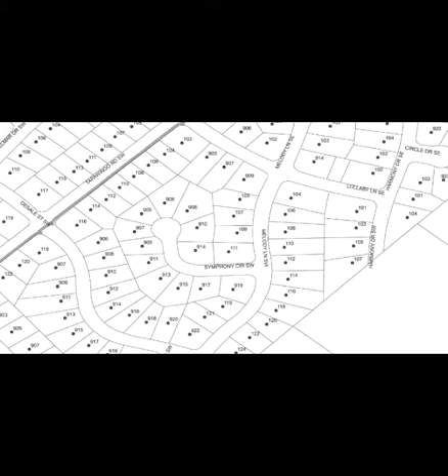Neither of the concepts to be presented with this report extend into the cul-de-sac and route around the perimeter of the cul-de-sac. Both concepts reach into the main stem of the roadway a sufficient distance to increase the sight distance. So here's a diagram that illustrates the sight distance. Here we have a vehicle that's just turned off of Melody Lane onto Symphony Circle Southwest.

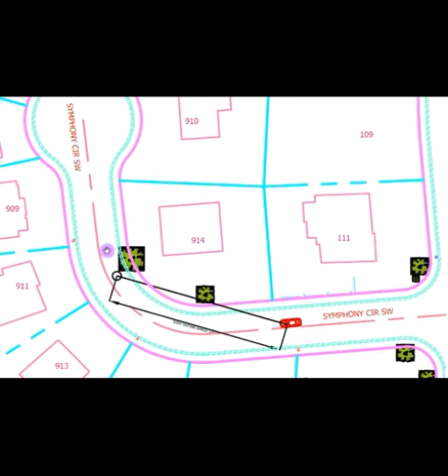When the vehicle is at this location, the topography, the elevation of this yard, as well as the existing tree here and the existing tree here, limits the driver's ability to see beyond the turn in this area. His vision is obstructed. The driver has clear vision in this area that I'll outline here. That's the driver's area where he has clear vision. But beyond that, farther into the cul-de-sac, his vision is obstructed by the trees and the topography, the elevation in the yard of 914.

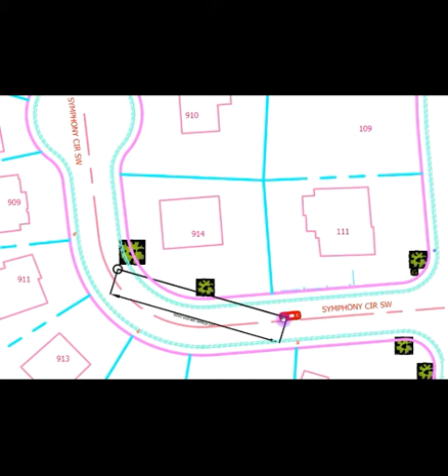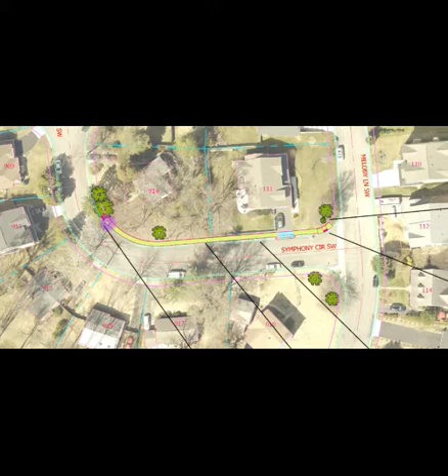This is Concept 1, which is sidewalk along the north side of Symphony Circle Southwest, which would be the even side addresses. It starts at the curb return of Melody Lane and extends along this main stem section of the roadway to where the existing Norway spruce is, and it ends with an ADA ramp at that location. Let's look at the typical section for Concept 1.

First of all, we have a 36-foot wide street from the face of the curb to the face of the curb, 36 feet. We have a 50-foot existing right-of-way. So that means that we have 7 feet from the face of the curb to the right-of-way on each side. For this concept, we're using a 1.5-foot utility strip behind the existing curb and then a 5-foot concrete sidewalk.

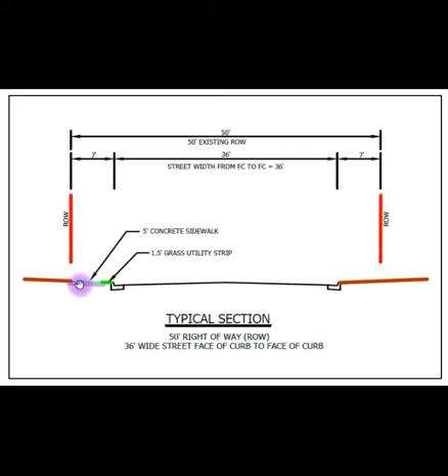As an alternative to this, in the later stages of design, we could use a different section, which would be a 6-foot concrete sidewalk behind the existing curb and not have a utility strip. That could be determined later in the design.

Here we're looking at an aerial photograph with Concept 1 drawn on top of it. You can see on the photograph the magenta lines, which represent the right-of-way lines. The cyan lines represent the property lines. These green symbols are the trees that were part of the tree inventory done by our arborist.

So for example, this is an 11-inch Norway spruce. This is an 18-inch diameter Norway spruce. This tree is one that was just planted by the development as it was being completed. And also this photograph of this lot shows this is the house that's been removed and a new house has been constructed. The approximate footprint of that house is shown in the pink line here.

So here is an ADA ramp, which is the end of the project on the western end. And then we have the sidewalk along the frontage of 914. And then here at the corner property, which is 111 Melody Lane, there's an existing fence that starts approximately at this location, and it extends to where the driveway is. So we'll have the sidewalk outside of that fence running parallel to the fence, and then we'll have a replacement driveway apron, and then we'll have at the curb return another ADA ramp.

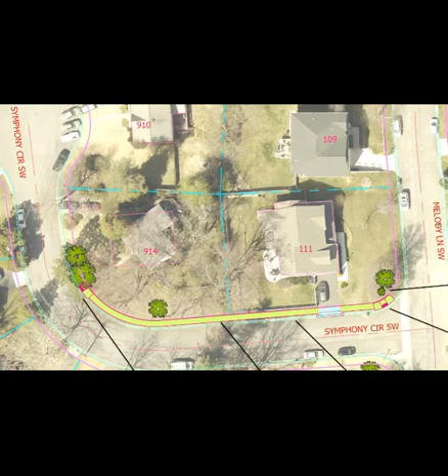Next, let's look at the photographs of the areas of the design. Here you can see where the project ends. This is the 18-inch Norway spruce, and this is the 11-inch Norway spruce. This is the site while it was still in construction, but the ADA ramp would be approximately at this location here.

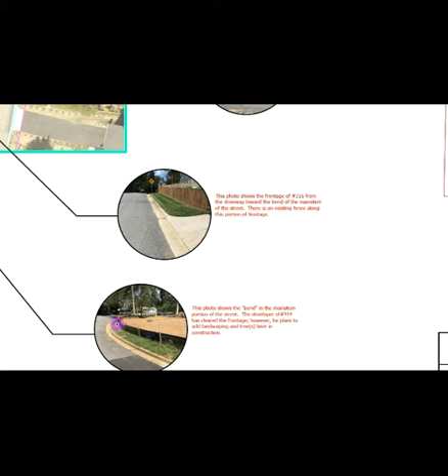Okay, here in the next photograph, what we're looking at is the curb return where the main stem of Symphony Circle starts to round the corner going towards the cul-de-sac. Again, this photograph was taken during the construction. You can see the silt fence is up, but that house has since been completed and the lot has been regraded, so it looks different than that today.

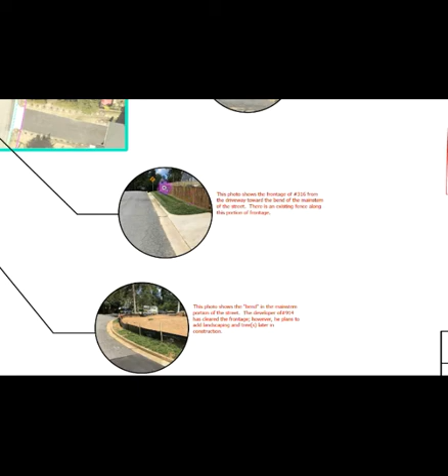Now let's look at the photo above. This photo shows the frontage of 316, taken approximately from the driveway, looking to the west towards the bend of the main street. You can see there's an existing fence along this property. Here's the existing curb, and the proposed sidewalk would go between the two.

Okay, next, in this photograph, we're standing at the intersection of Melody Lane. We're looking to the west, and here you can see the driveway that we mentioned, existing fence, and the sidewalk will continue across the driveway and will end approximately at this location.

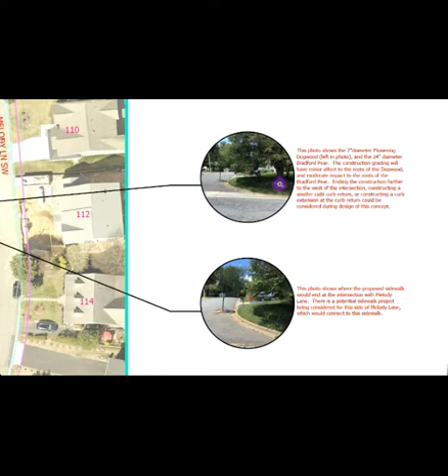The next photo above is taken from across the street, across Melody Lane, looking towards where the project is. Again, the project ends at about this location, and at this corner you can see there's an existing 24-inch diameter Bradford pear, and then just next to it there's a 7-inch diameter flowering dogwood.

So that's concept one, which is sidewalk on the north side, which is the even side of Symphony Circle. And it's a design which has the sidewalk extending about 250 feet from Melody Lane into Symphony Circle Southwest. Next, let's look at concept two.

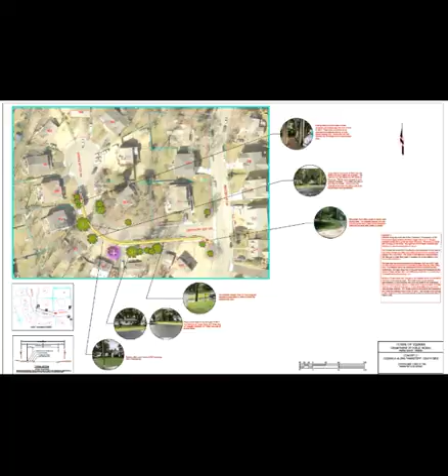Here we have concept two. Concept two is a lot more challenging than the first concept, and the reason for that is we have larger trees along the frontages of the properties, and also we have existing utility poles. The big challenge with concept two is getting around this existing utility pole, which is situated between 917 and 919. Let's look at the photograph of that location.

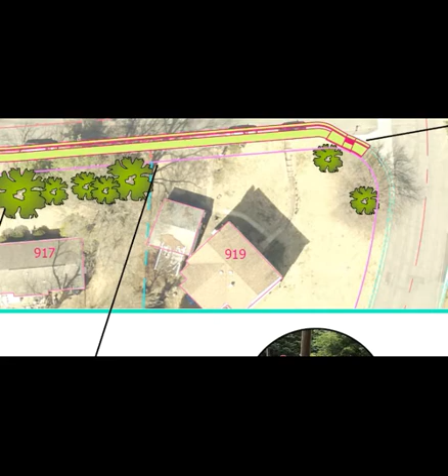Okay, here you can see is the existing utility pole, existing curb, and here's the existing fence, which is actually at the property line. There's no way to put a sidewalk between the curb and the pole in the front, and there's no way to put a sidewalk behind the pole and in front of the fence. So the only way to get around this issue is to bring the sidewalk inside of the street. In other words, rebuild the street to a narrow width, rebuild the curb, and then put the sidewalk in this area.

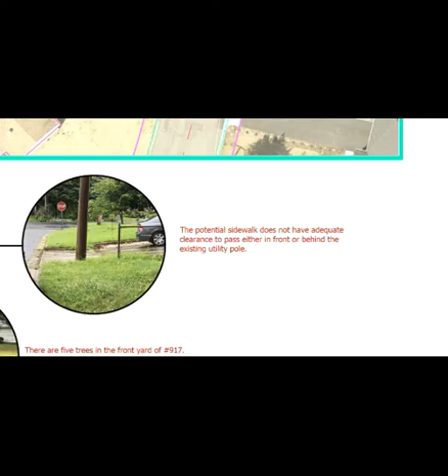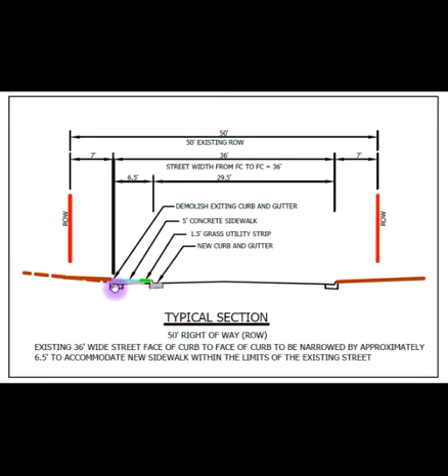And what that would involve is bringing the new curb in 6.5 feet from where the old curb is, resulting in a street width of 29.5 feet, which would allow 6.5 feet between where the new curb is going to be and where the old curb was taken out.

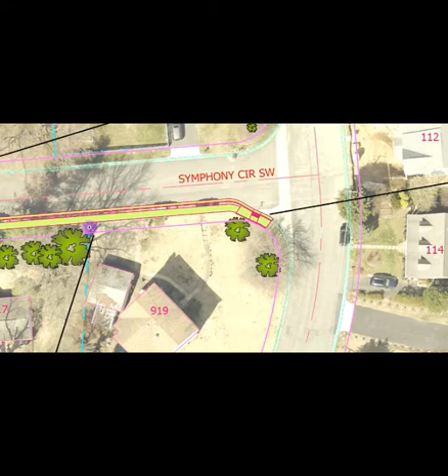Here's a closer look at the alignment starting at Melody Lane. We have a new ADA ramp which ties into the existing curb at Melody Lane. Here is where we make the transition to the narrower width. So we have a 29.5 foot width from face of curb to face of curb. Here between 919 and 917, here's that utility pole that we saw in the photograph. And now let's move farther down the street to the next property.

At 917, there are quite a few trees in this frontage. Some of them are fairly large trees, but because the new curb and sidewalk is inside of the old curb, I'm not real concerned about cutting the tree roots because we're already underneath where the existing pavement is.

Likewise, in 915, there's a large tree, but because the construction is taking place inside of where the old street is, I'm not too concerned about the tree roots of that tree. Here, between 915 and 913, there's another utility pole. Now let's take a look at the photographs of those features.

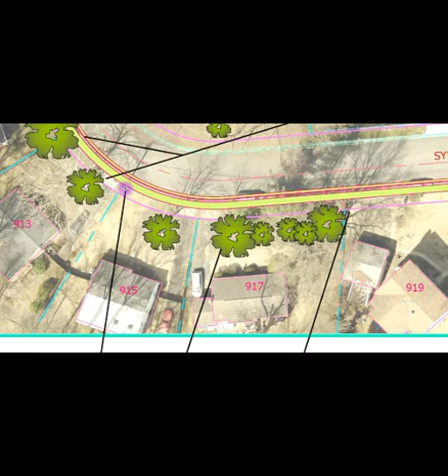Here we have the frontage of 917 in this photograph. We have a 24-inch sugar maple, 18-inch white pine, 12-inch Canadian hemlock, 18-inch white pine, and a 26-inch Norway maple that shows up in the next photograph. The photograph below, this is the existing utility pole that's in front of 915, and you can see there's a large tree in the background.

And here we're looking at the frontage of 913 and 911. We have another large tree in front of 913. And there's another large tree in front of 911. And then we have these three trees, which are between 911 and 909. And also there's a utility pole in there.

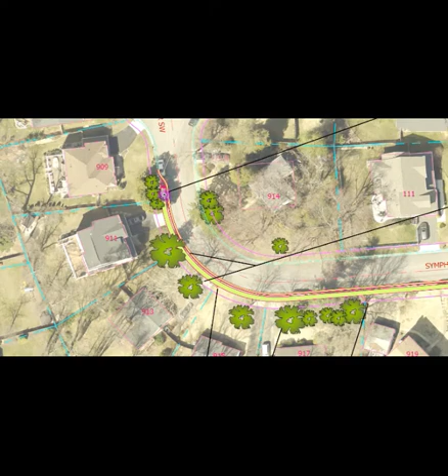This is where we make the transition back to the existing curb at the wider width. And we end with the handicap ramp at that location. It's oriented in this direction. So let's take a look at those photographs of that area.

Looking at the lower photograph, here we have the frontage of 915. You can see the tree, which is a 16-inch red maple in that property. Next, at 913, you can see that there's a large tree, which is a 34-inch American sycamore. And both of these trees have large root zones, especially the American sycamore. But because the construction is going to be inside of the existing street, those trees should be protected.

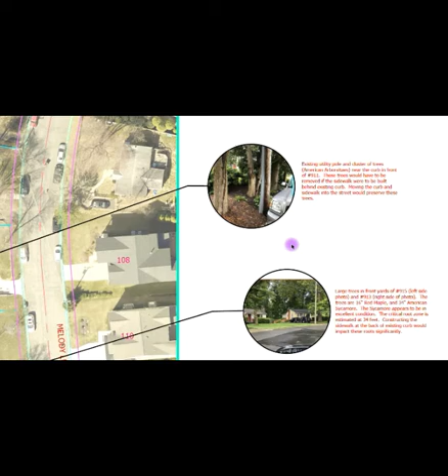Looking at the next property, here we have the frontage of 911. You can see the three trees, the American arborvitaes, and the existing utility pole, which is located very close to where the existing curb is. So there's no way to get a sidewalk in here, so that's another reason why the sidewalk under this scenario has to be built inside of where the existing curb is.

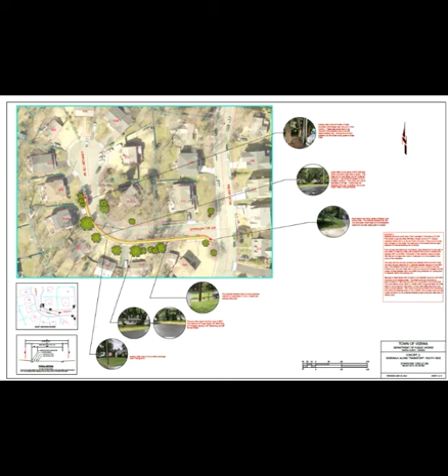So this is our design under concept 2. Again, the south side of Symphony Circle has quite a few challenges. We have the utility poles that are too close to the curb, and then we also have many trees along the frontages that make constructing a sidewalk behind existing curb impossible, so we've had to bring the sidewalk inside of the existing street under concept 2. Next, let's look at the two concepts and do the analysis, which is part 3 of this report.

Here's the analysis of the two concepts. We have the analysis of Concept 1, which is the construction on the north side of the main stem of Symphony Circle, which is the even side addresses. Concept 2, which is construction on the south side of Symphony Circle in the main stem, which are the odd side addresses.

Late last year, Department of Public Works sent out questionnaires to the owners along the properties of Symphony Circle. From the responses that we received for Concept 1, the even side addresses, we had one person in favor of sidewalk and one not in favor. The one person who was in favor of the sidewalk on that north side happens to be the corner property. From those same questionnaires, we had one person on the south side in favor of sidewalk and 3 homeowners on the south side who were not in favor of sidewalk.

Next, let's look at the tree impacts for the 2 concepts. Under Concept 1, the construction of this concept does not require removal of any trees. The western limits of this concept end just east of the existing Norway spruce that the developer preserved during construction of the new house. The sidewalk construction should not affect the roots of that tree. During the construction of the new house, they installed a new water line, and those roots were already disturbed because of that construction.

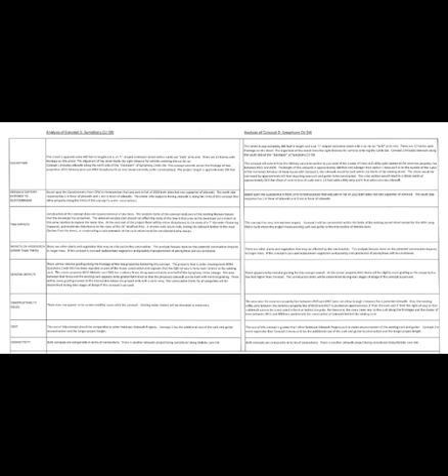The cost analysis of the 2 concepts shows that Concept 1 is comparable to other Robinson sidewalk projects, whereas Concept 2 is more expensive than most of the Robinson sidewalk projects because the curb has to be reconstructed. And regarding connectivity, both concepts are comparable. There is a Robinson sidewalk project that's being considered for Melody Lane, and that would create the connectivity to the sidewalk network.

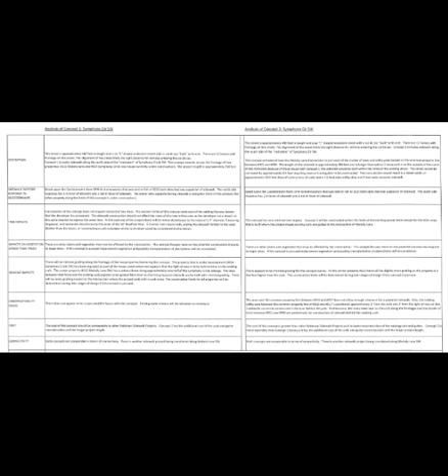Finally, in consideration of the factors described within this report, and primarily because of the increased cost associated with building Concept 2, having to rebuild the curb and gutter, Department of Public Works recommends Concept 1.